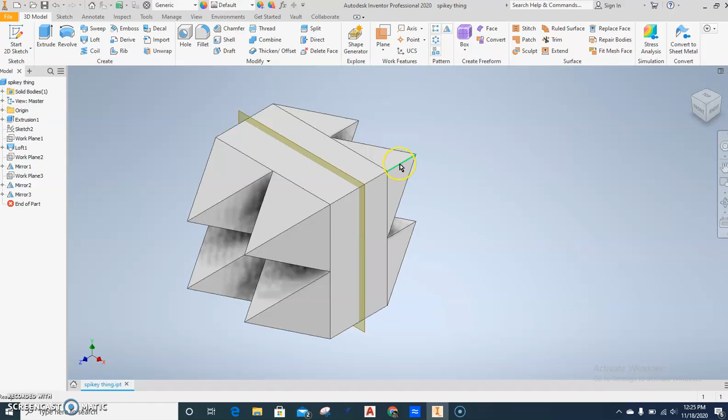All right, welcome back. We're going to make this spikey thing. That's what we're actually naming this, so I'm going to call this thing spikey thing.

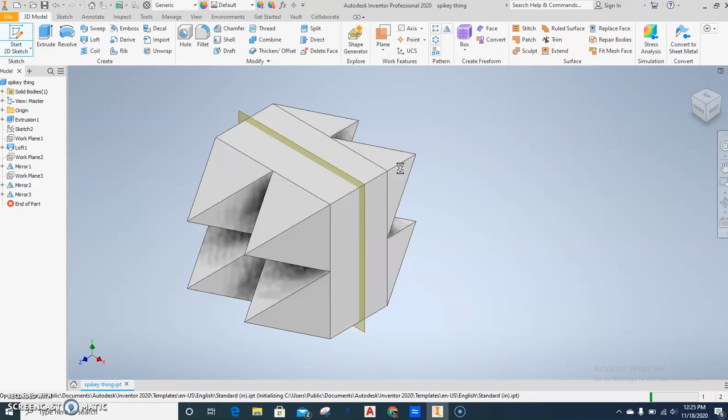All right, we're going to make this. We're going to learn how to do some lofting, some mirroring, and working with some planes. Here we go. Start 2D sketch. File, new, in.ipt. There we go. All right, hit Start 2D Sketch. Press XY, and there we go.

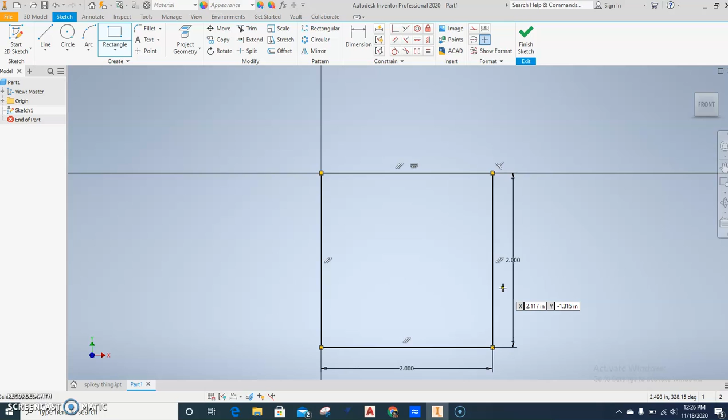All right, so we're going to start by doing a rectangle. Click here in the middle, 2 by 2, so 2, tab 2. Make it really easy on you this time. All right, 2 by 2. Got it? Good. Finish sketch.

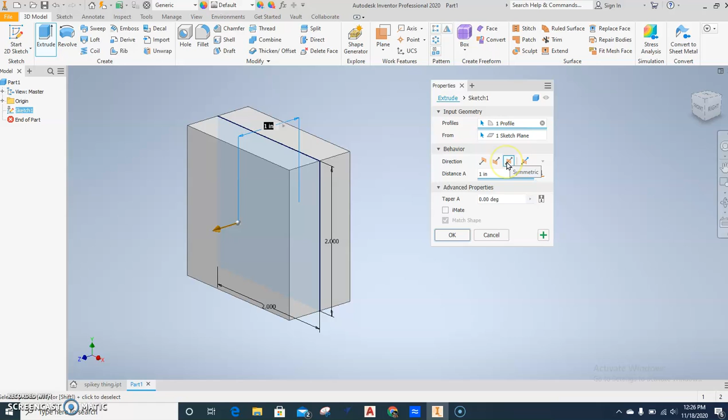This time we're going to do an extrusion a little differently than we've done in the past. So choose Extrude, but this time I want you to look at your extrusion properties and pick symmetric. Symmetric, it's this one right here. Make sure you see that, symmetric. This will be really important later on. Okay? So just do that, press OK. Got that done? Good job.

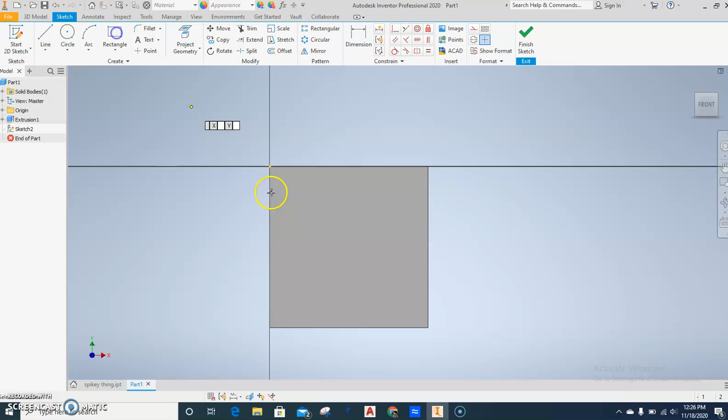All right, so we're going to click on the front of this now, and we're going to go to the very right side. We see those 5 icons and go Create Sketch. Okay, so then we're going to click Rectangle, click this dot right here, and bring it out, and this is going to be 1 by 1. So 1 tab 1, and then press Enter. Got that done? Press Finish Sketch.

Now, we're not going to extrude this. Sorry, I'm on the phone with something right now, so I'm multitasking this. Let me turn that down some. All right, love being on hold. Okay.

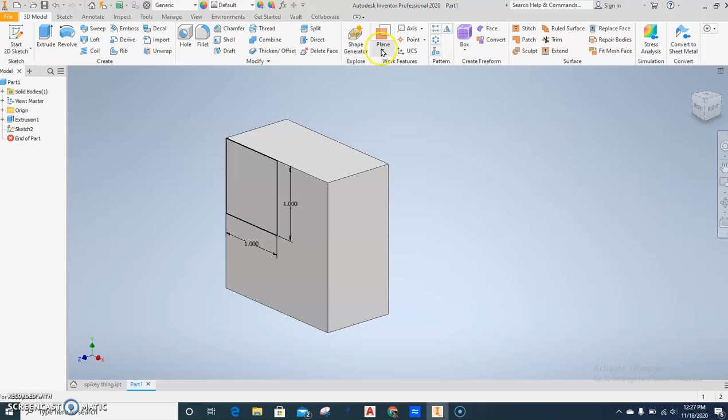So now we're going to go to Plane Offset. Okay, so Plane from Offset. Click this, and it's going to give me an arrow going this way. I want to go 1 up. Let's go make this really simple. So this is a plane that we can work off of now.

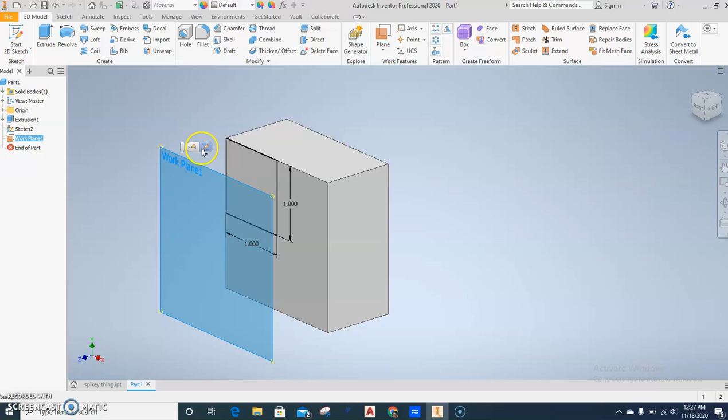Once you do that, you have to click the edge of this. Don't click the middle because nothing's going to happen. Click on the edge of this, and you'll get 2 icons. I want the one that says Create Sketch. If you're struggling with that, you also can right-click on it and go Create Sketch too.

Okay, so here's next, I want you to go Point. Dump a point somewhere right here in the middle. But I want to make sure this is put in the right spot. The only way to do that is to hit Dimension. You're going to click this dot here, click the little point you made, and bring it out to the left. Click here and type 0.5.

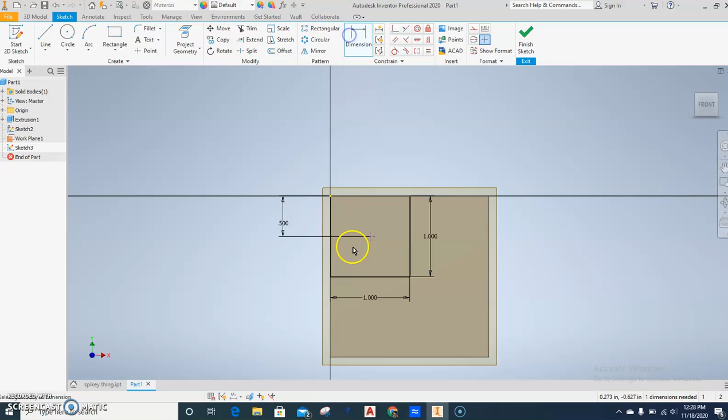So I want this thing to be centered. Hit Dimension again. Click the dot. Click this dot. Bring it up. Click. Type 0.5. Press your Finish Sketch button.

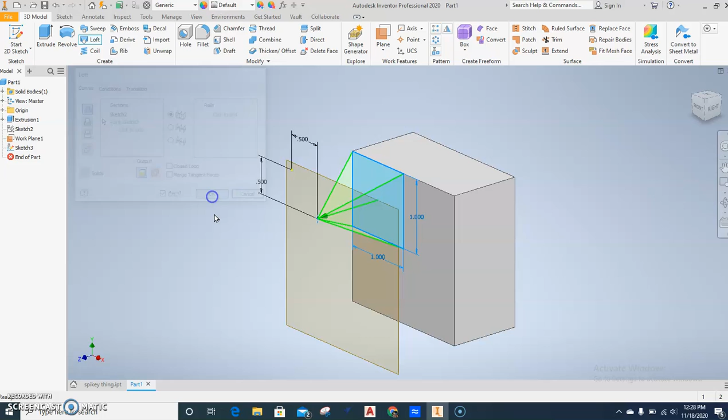Okay, next we're going to do something called a loft. So click Loft. You're going to click the square right here, then click this dot right there, and press OK. And look at that, you made a little pyramid there. So this thing is now finished.

So I want to turn this thing off so I don't see it anymore. So if you right-click on this, there's a visibility button. Uncheck that, please.

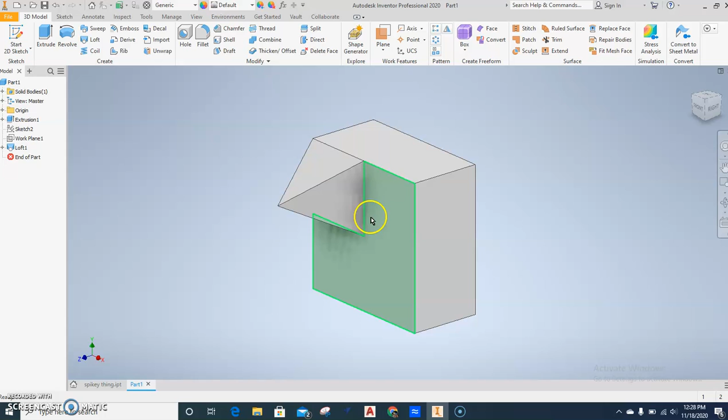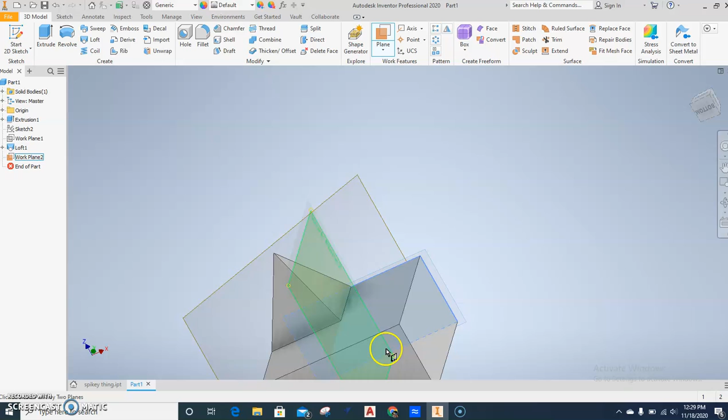Okay, so next we're going to do a series of mirroring. Hit Plane up here at the top of your screen. Now this one, I want you to hit this side here. Now you have to shift and scroll, so hold Shift and scroll and move your mouse, and click the other side there so you get one right down the middle. In fact, I'm going to go ahead and do the other side too, so I'm going to do top and bottom, because it doesn't really matter which order we get. When you do that, it makes a plane that's right down the middle on both sides, which is what we're doing.

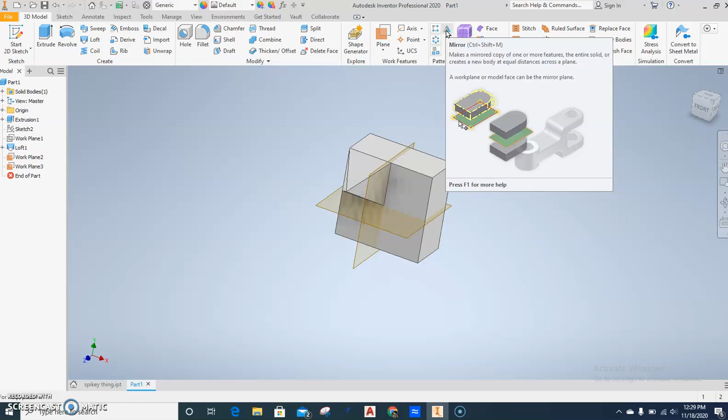Okay, looking at my screen, I want you to hit Mirror. The quick command for Mirror is Control-Shift-M. But I'm just going to click the icon up here, click that. Here's what you're going to do: you can either go to your project browser and click the word Loft, or click on the pyramid itself. Click Mirror Plane. Now click here towards the bottom because I want this plane right here, and you see it gives a preview. Press OK.

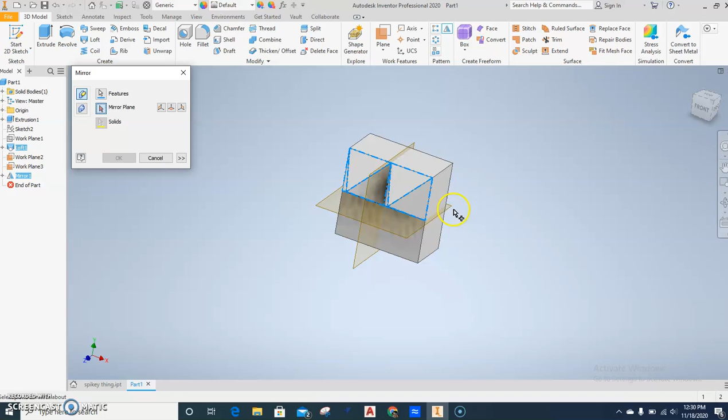Do it again. Hit Mirror. Click on these, make sure you click both of them. If you click the mirror, it'll automatically choose both. If you click the left one first, you'll have to choose the other one. Not a big deal either way. Choose Mirror Plane, choose the other plane, press that. You get a preview. Press OK. You're done.

Okay, now so we don't have to deal with all these planes, we also can click over here and right-click and uncheck your visibility too. Now those are going away.

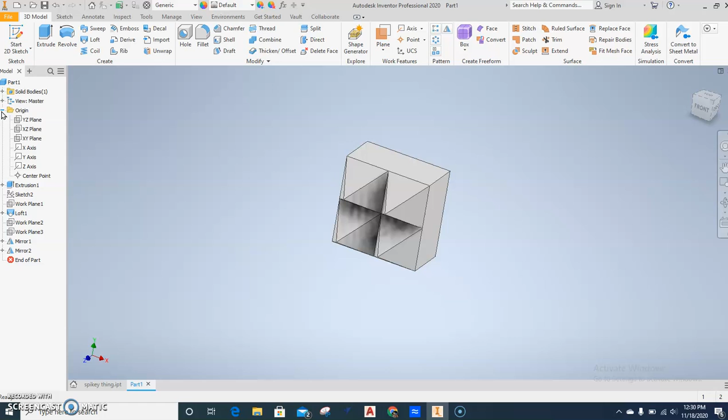So how do you get these on the other side? Well, you're obviously going to do a mirror. In this case, I want you to hit plus on the origin and scroll down here, and you should have an XY plane that's right through the middle of your surface. That's why when you extruded it, you did the symmetric thing. So I'm going to click on XY, right-click, and go visibility so I can utilize this.

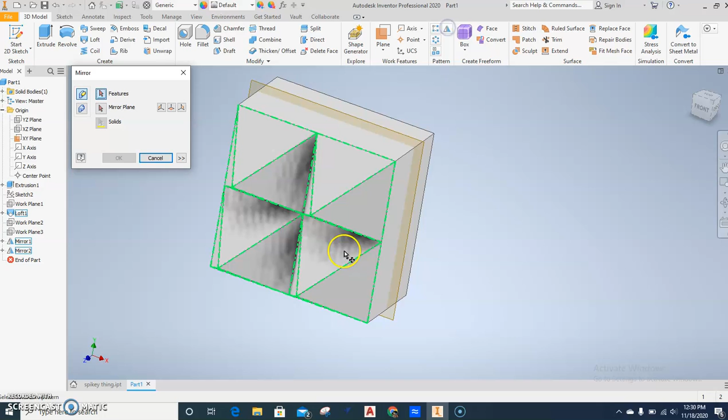Your last step is to hit mirror. You're going to click these, hit mirror plane, choose the middle, press OK, and guess what? You got spiky things all over the place. You are done with this little tutorial.